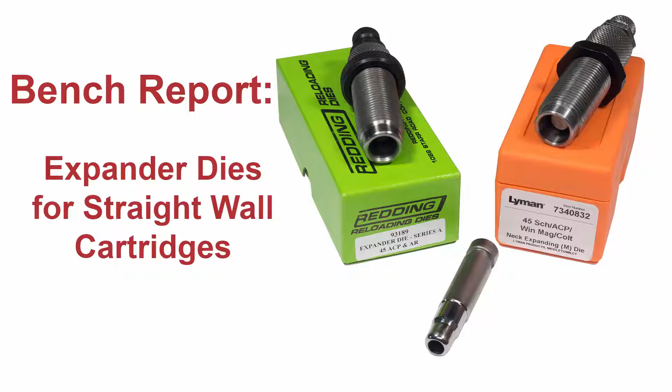Hello, I'm going to compare the Dillon powder funnel, the Redding expander die, and the Lyman M-Series expander die to see how well they expand and flare our cases to make bullet seating easier. You may have heard the terms expansion and flaring; flaring is sometimes called belling. Is expansion and flaring the same thing?

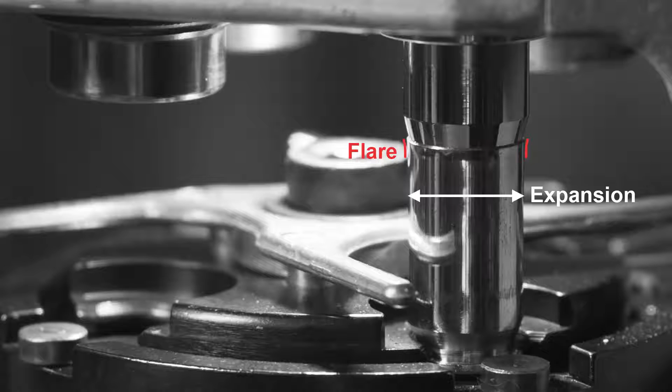No, they are not. Expanding is increasing the diameter of the upper portion of the case. Expanding makes it easier for the seating die to push the bullet into the case. We will see that in the Redding and Lyman dies, they have a two-step expansion. Flaring is changing the shape of the case mouth into the shape of a bell or trumpet. Flare makes it easier to place a bullet into the case. Let's look at each of them in detail.

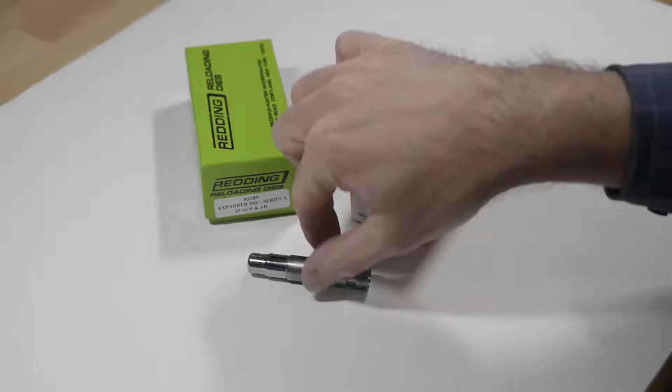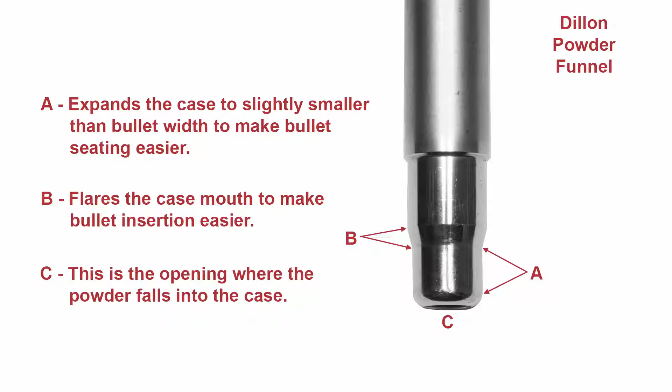The Dillon powder funnel is one piece and fits inside the Dillon powder assembly. This allows powder charging at the same time the case is expanded and flared. Section A of the funnel is the expander, Section B of the funnel flares the case, and opening C is where the powder from the powder bar falls into the case. This kind of configuration is sometimes referred to as powder through expander.

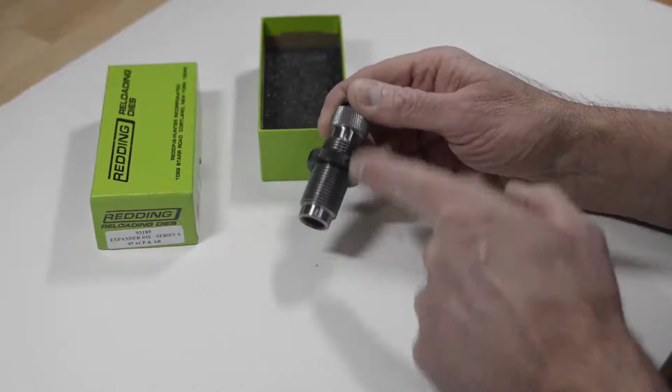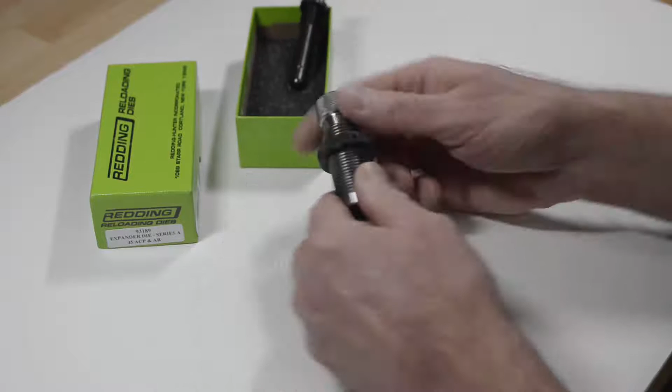The Redding expander consists of the die body, the expander, lock ring, and it comes with a die lock ring. My die, which I purchased new in box, did not come with any instructions.

Looking closely at the expander, you can see it has a two-step expansion. Step 1 expands the case to slightly smaller than the bullet's width. This makes bullet seating easier, and this is what the bullet sits on top of when you place the bullet in the case. Step 2 expands the case to slightly larger than bullet width. The bullet actually sits in and is supported by this area. Section 3 flares the case mouth.

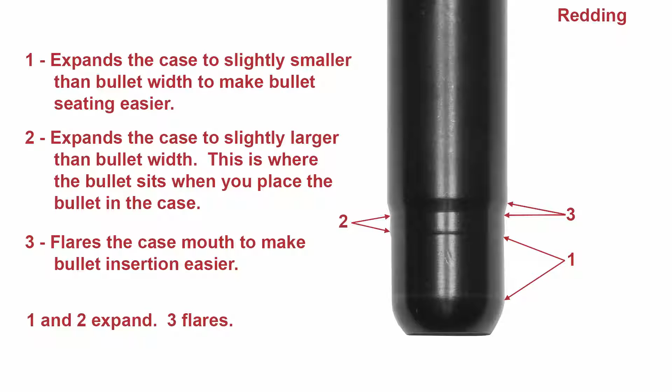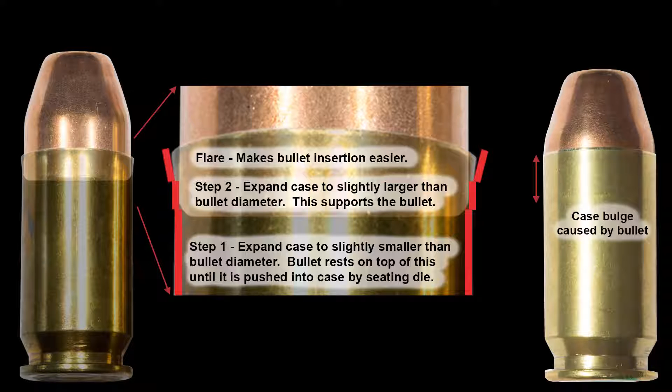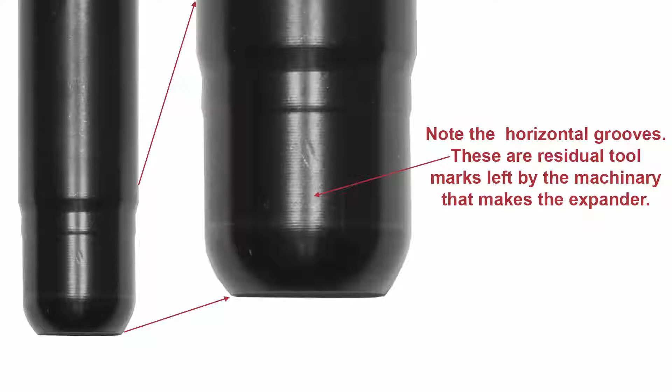As the bullet is pushed into the case by the seating die, the bullet will increase case width to accommodate the bullet. This often results in the bulge you sometimes see in a finished round, as shown on the right side of the image. On the Redding expander, if you take your fingernail and run it up the length of the expander, you will feel slight ridges. These ridges are residual tool marks. We will see later in the video what these tool marks do to brass.

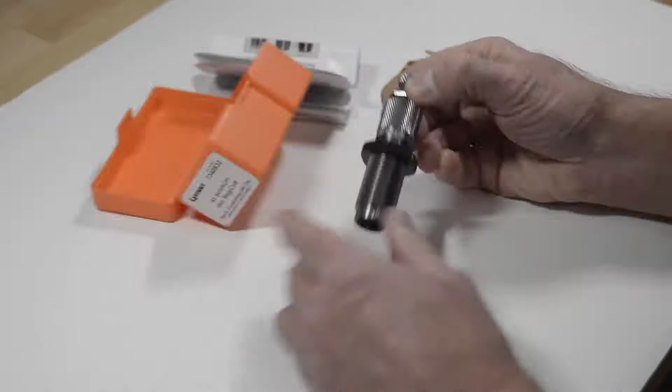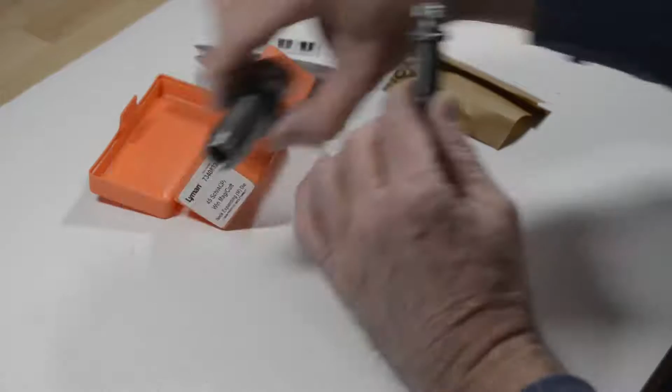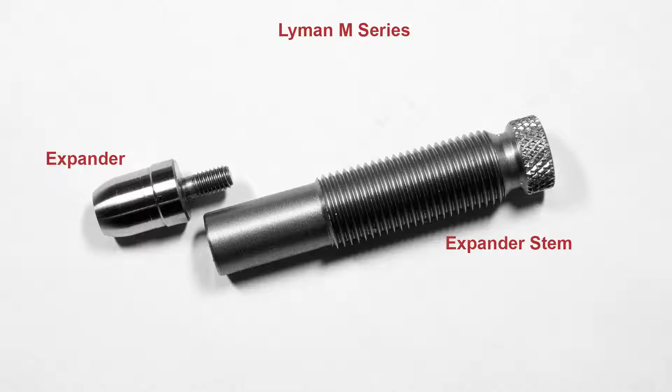The Lyman expander die consists of the die body, the expander, lock ring, and it comes with a die lock ring. It also comes with detailed instructions and a protective sheet. The expander actually comes in two parts. The polished part is the actual expander and flaring tool. The rest is the supporting stem.

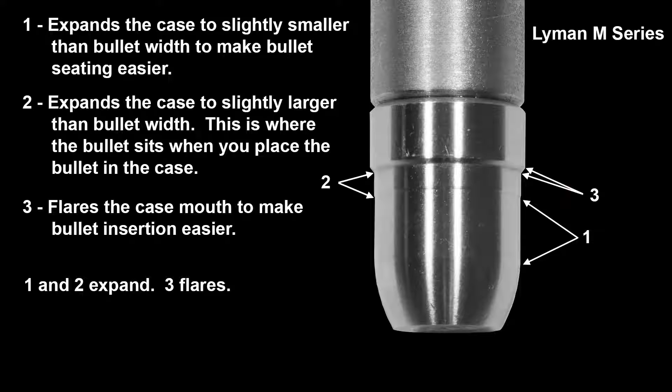The Lyman M-Series has two-step expansion and flaring, as you can see in this close-up. Step 1 expands the case to slightly smaller than the bullet's width. Step 2 expands the case to slightly larger than bullet width. And Section 3 flares the case mouth. The actual expander is polished steel and does not have the tool marks the Redding expander has. Note that there is no opening in either the Redding or Lyman expander for powder drop. They expand and flare only.

Prior to installation, you'll need to know how large a flare you wish to put on the case mouth. This is part of the reloading data you need to gather. As you install your dies, keep in mind you can adjust for the size of the flare. You cannot adjust for the size of the expansion.

In my installing reloading dies on a Dillon 550B video, I show the installation of the Dillon powder assembly, so I won't duplicate those steps in this video. But I will say that when installing new dies on a Dillon press, the most frustrating and time-consuming station for me to set up is the powder assembly station, and this is because of trying to get the flare just right.

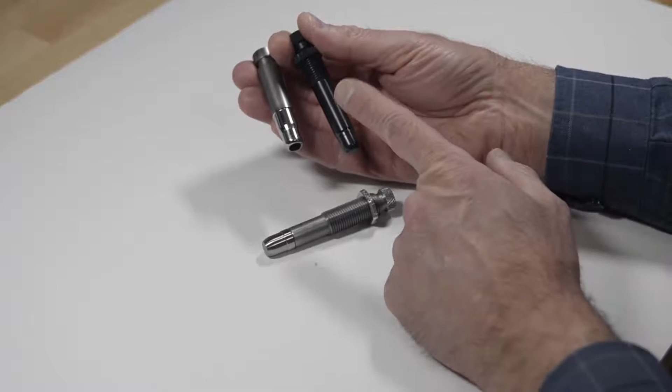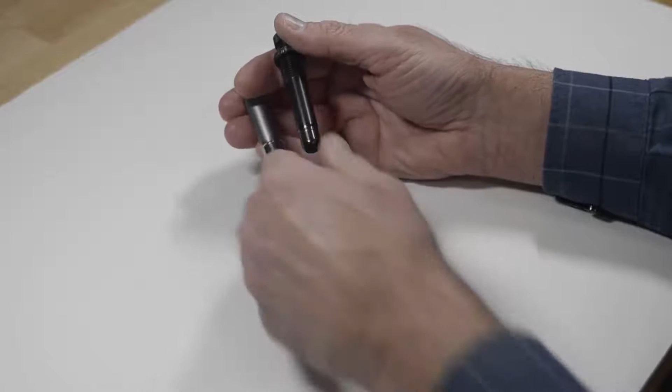If you decide to use a separate expander die in conjunction with the Dillon powder assembly, there are two things to keep in mind. First, the expander die should be installed in the station before the powder assembly and not after. If you install the expander die in the station after the powder drop, there is a chance the expander, as it enters the case, will compact and possibly crush the powder. Either of these could possibly change the burn rate of the powder.

Second, adjust the Dillon powder assembly so it only drops powder and does not flare. The expander part of the Dillon powder funnel still needs to enter the case. This is necessary so that the case can push the funnel up into the powder assembly and release the powder.

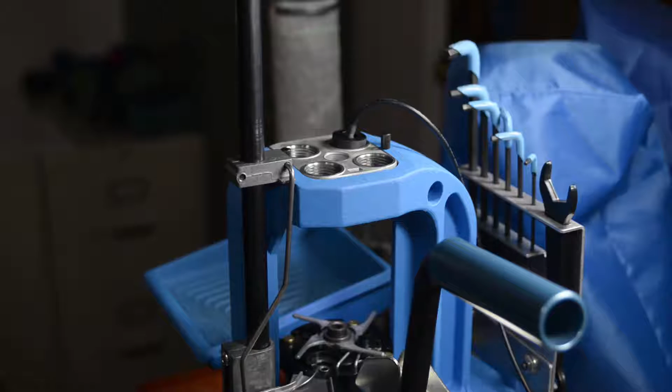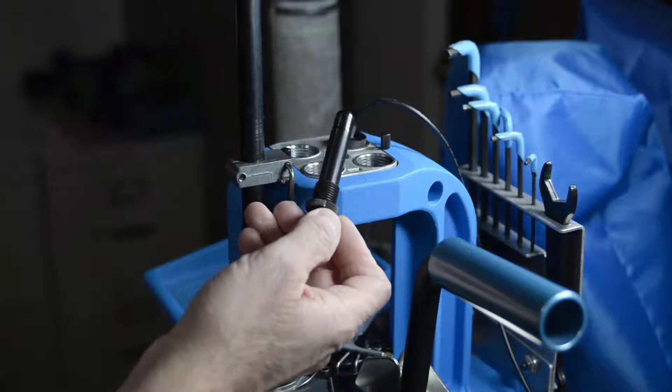The installation of the Redding and Lyman dies are identical. First, remove the expander and clean the expander to remove any manufacturing oils, greases, or protective coatings. Leave the expander out of the die body. Second, place a small piece of 3x5 card or business card on the shell plate and raise the shell plate to the top.

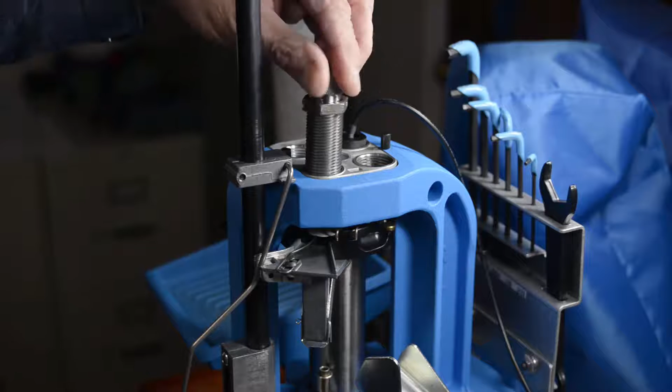Third, screw the die body without the expander into the tool head until it just touches the 3x5 card. Right there. Now tighten the die lock ring. I'm using the Dillon die lock ring for expediency in making this video.

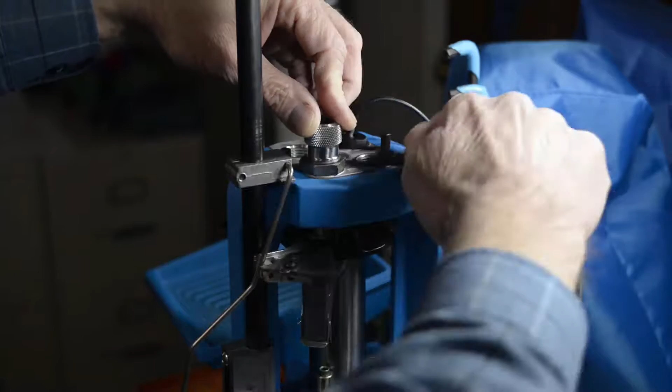Now lower the shell plate, remove the cardboard, and insert a resized piece of brass and raise the shell plate. Take the expander and screw it in until it touches the case. Now what we want to do is lower the shell plate, screw in the expander some, raise the shell plate, then lower it again, and use our calipers to check the amount of flare. And we will repeat this process until we have the desired amount of flare.

Once you have the desired amount of flare, leave the case in the shell plate, raise the shell plate, and then tighten the expander lock ring.

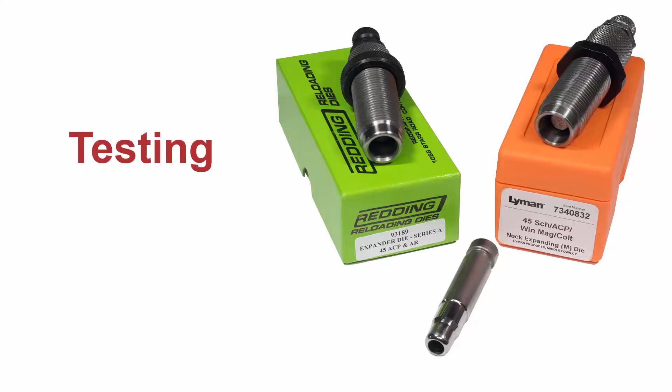I have also installed the Lyman expander die so we can do a side-by-side comparison. We're going to expand and flare 25 cases in both the Redding and the Lyman dies. All cases are Starline brass and are many times fired. This means there's a solid coating of residual carbon inside each case. This carbon acts as a lubricant.

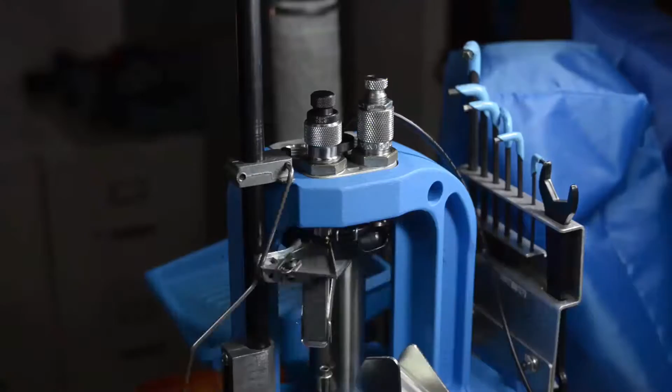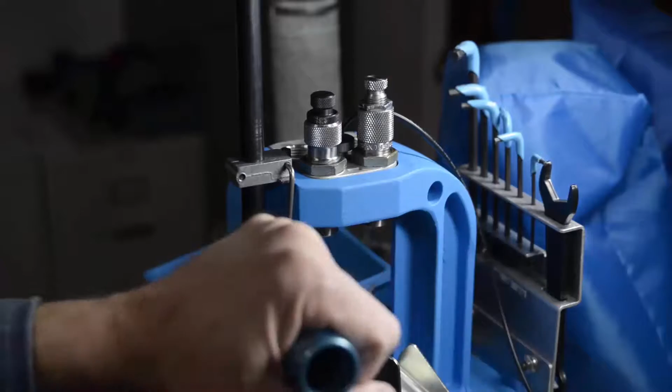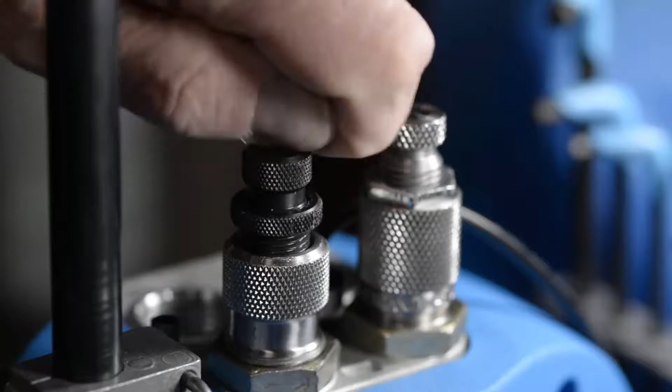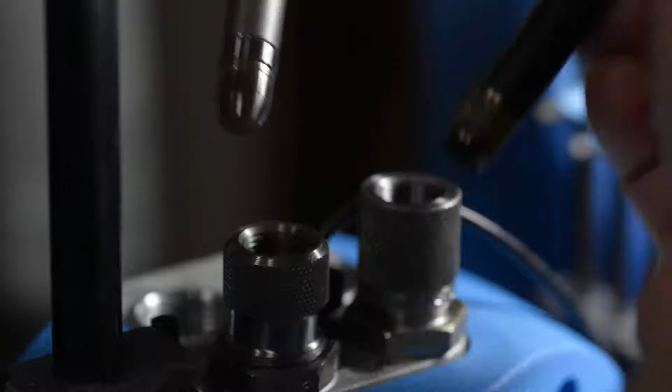This brass coloration here is actual brass that came off of my cases and onto the expander. This is the Redding expander. This is the Lyman expander. There is some coloration there, but less than what is on the Redding expander. Both expanders have a buildup of brass on them after only 25 cases. The Redding more than the Lyman. I've never had this much buildup of brass on the Dillon powder funnel.

I contacted Redding and we went through a checklist of questions. Was I using new or once fired brass? The answer is no. As I stated in another one of my videos, brass buildup is more common with new brass than many times fired brass. I actually clean my new brass before reloading them to avoid this issue.

They also asked me if I'm trimming, chamfering, or deburring my cases. The answer again was no. Trimming, chamfering, and deburring will create small brass shavings that, if not removed prior to reloading, can cause a buildup of brass on certain dies. We then arranged for me to get a polished expander.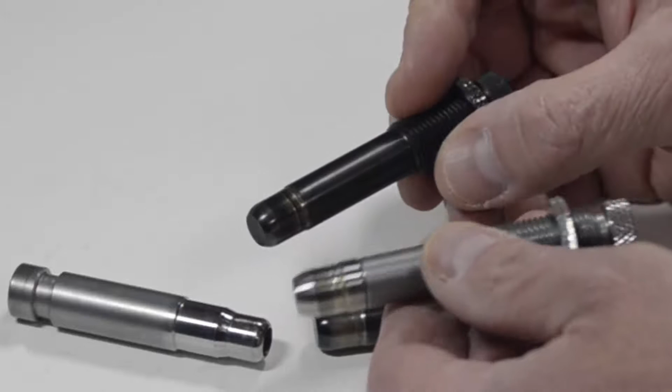Using the polished expander, I reran the test with 25 many times fired Starline brass, and the results I achieved were in line with the Lyman M-Series expander die. Let's take a close look at that test using the polished Redding expander. We're going to repeat the same test, but this time we're going to be using the polished Redding expander.

Okay, so we've got the polished expander set to give us the proper flare. Now we're going to run 25 cases through it and see what happens. Alright, well this is the shell plate after using the polished Redding expander. The amount of brass shaving is significantly less than the unpolished expander, but just a little bit more than what the Lyman had. So let's pull the Redding polished expander and see what it looks like.

Now, this is the polished expander. This is the unpolished. This is the Lyman. We'll take a better close look at these.

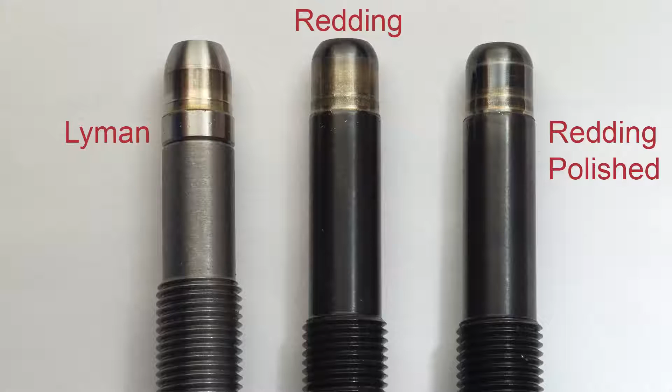Next, I checked to see how well the cases held a bullet before bullet seating. This is a 357 mag case that was expanded and flared by the Dillon powder funnel. These two cases, 45 ACP, this one was expanded and flared by the Redding die, and this one was expanded and flared by the Lyman die.

When I place a bullet in this case, you can feel that it's like resting on top of the flare. But on these, you can actually feel the bullet go inside the case as it goes into that step 2 expansion and rests on top of the step 1 expansion.

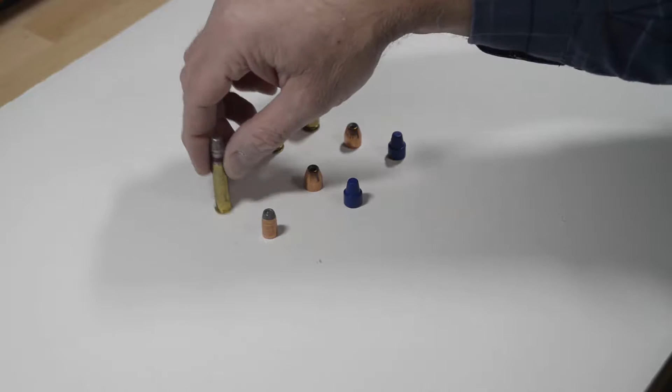Now let's try it without the copper jacketed. This, of course, is a lead truncated cone. And again, you get the sense, the feel that it's resting on top of the flare. And the polymer coated one goes inside the case, again, into the step 2 expansion and resting on the step 1 expansion. I've also noticed that when loading lead bullets, shaving is reduced when I use a two-step expander.

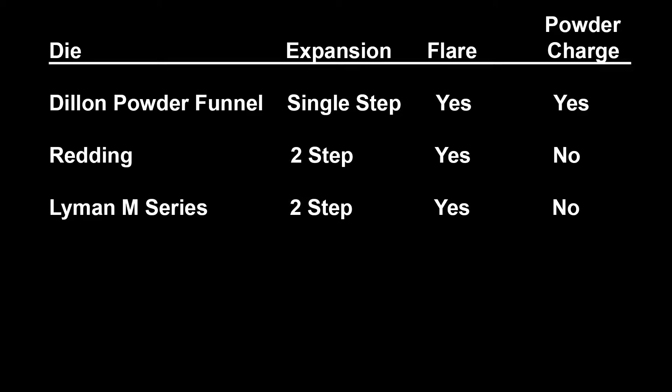Now let's summarize the differences of each. All three expand and flare. The Dillon has single-step expansion, and the Redding and Lyman have two-step. Only the Dillon is a powder-through expander. This table shows the measurements for 45 ACP. For comparison purposes, the diameter of a Zero jacketed hollow point 185 grain bullet is 0.4515 inches.

The Dillon expander has a diameter of 0.447 inches, which is the smallest of the three. The unpolished Redding Step 1 expander is 0.449 inches, and its Step 2 expander is 0.454 inches. The Lyman Step 1 expander is 0.4495 inches, and its Step 2 expander is 0.454 inches. As you can see, the Redding and Lyman are almost identical in size.

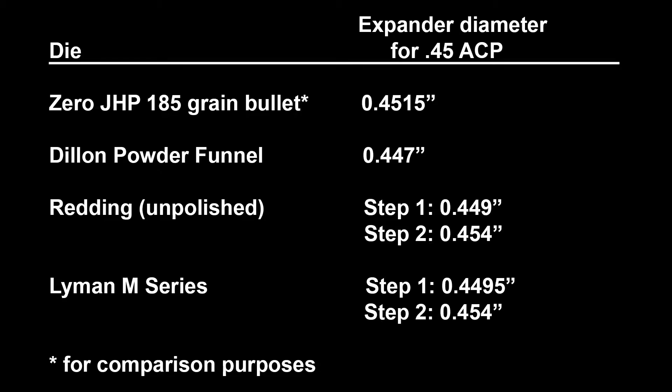The Dillon integrates expanding, flaring, and powder charge in a single step. This allows a single station on a progressive press to be used for all three operations. As you saw earlier, the brass buildup on the Dillon is significantly less than the Redding or Lyman. I find setting up the Redding and Lyman for expansion and flaring to be easier than setting up the Dillon powder funnel. I have also experienced that two-step expansion is better than single-step, especially for lead bullets.

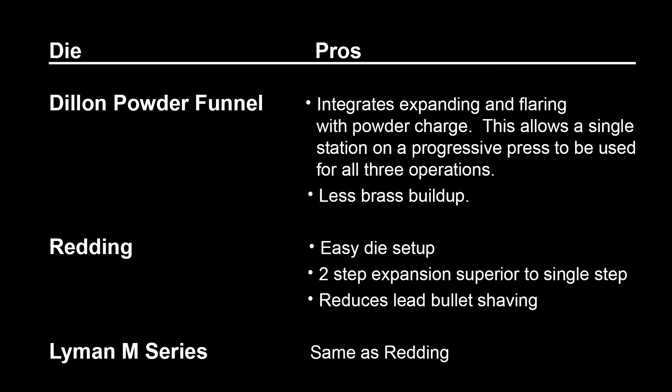As stated earlier, for me, it is more time-consuming to set up the Dillon powder assembly to get the correct amount of flare compared to a separate expander die. And I think the two-step expansion is better than single. The Redding shaved more brass than the other two. I believe this is due to the residual tool marks. Keep in mind that if you polish the expander, you could void the factory warranty. The Lyman two-piece expander can come loose with use. I use blue Loctite thread locker to secure the expander onto its stem.

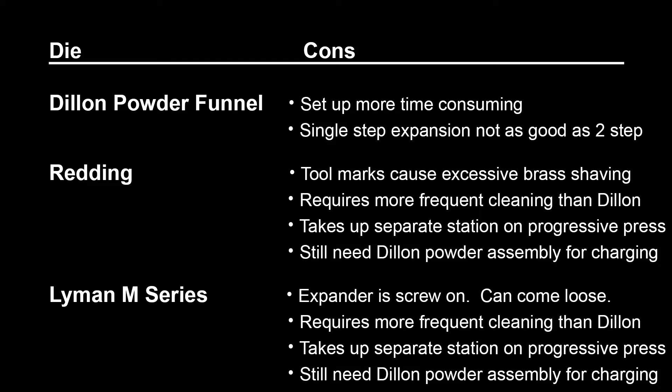Both the Redding and Lyman require more frequent cleaning than the Dillon and will take up a separate station on a progressive press. The use of the Redding and Lyman dies does not replace the need for a separate powder charge step. On a Dillon press, you will still need the Dillon powder assembly. And remember to charge the case after it is expanded and flared, and make sure the Dillon powder funnel does not increase the size of the flare.

In conclusion, both the Redding and Lyman do a superior job of expansion and help reduce bullet shaving. However, they will take up a separate station on a progressive press and could cause extra wear on brass. Of the two, I prefer the Lyman M series because the expander is factory polished, and I can resolve the issue of the expander coming loose with Loctite thread locker.